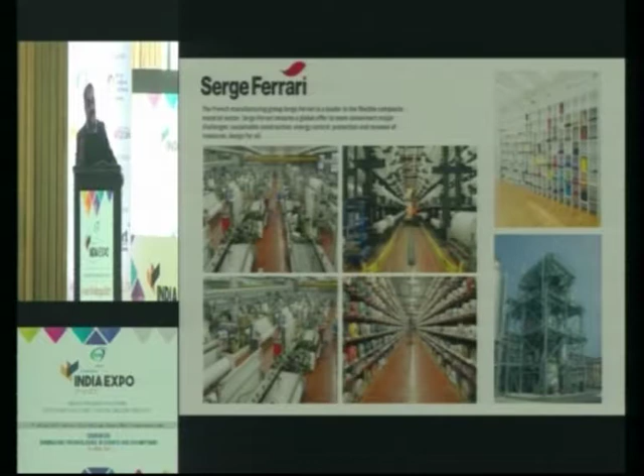My friend Mr. George has already covered the manufacturing process and the PVC, so I won't go deep into the manufacturing process, but I will highlight the technology Serge Ferrari is using today for the industry. We have a factory in La Tour-du-Pin, which is the Serge Ferrari factory and coating facility for Precontraint and for Batyline. Batyline is an extruded fabric coating.

We also have a factory in Switzerland where we manufacture our own yarn in Eglisau, and we have a recycling unit in Italy, in Ferrara. We have subsidiaries all over the world.

Now the applications: we are into multi-sector application of coated textiles. We are into textile facade, a permanent textile facade, and tensile architecture. We also manufacture fabric for furniture, indoor and outdoor, solar protection indoor and outdoor, modular structures and pagodas for the tent and event industry. We are also into printing fabric manufacturing.

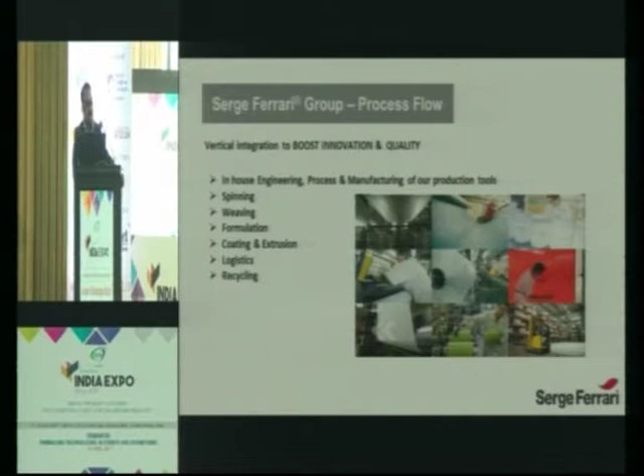About Ferrari, we have in-house engineering process and manufacturing of our production. We do manufacture yarns, spinning, weaving, formulation, coating and extrusion, logistics and recycling. It's a completely integrated company.

Now regarding the Ferrari technology: in 1974, when Serge Ferrari started this company, he innovated a technology called Precontraint technology. Precontraint is a French word, basically meaning pre-stress in English.

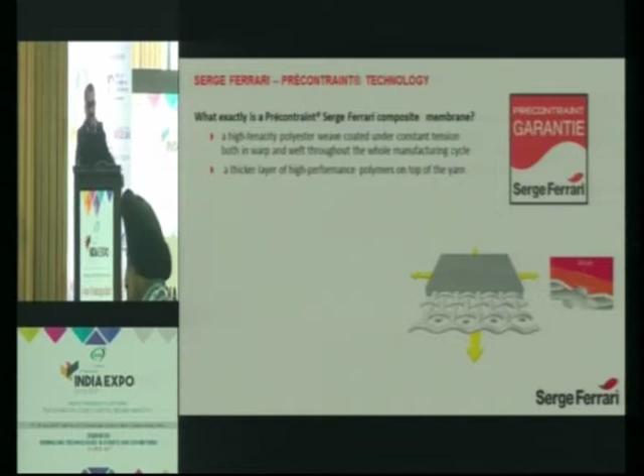During the coating process, the fabric is made of high tenacity polyester yarn. During the coating process, we stretch the yarn in both directions, warp and weft, with special application clips. The advantage is that the yarns will be flat and you will have better top coat thickness on the yarns.

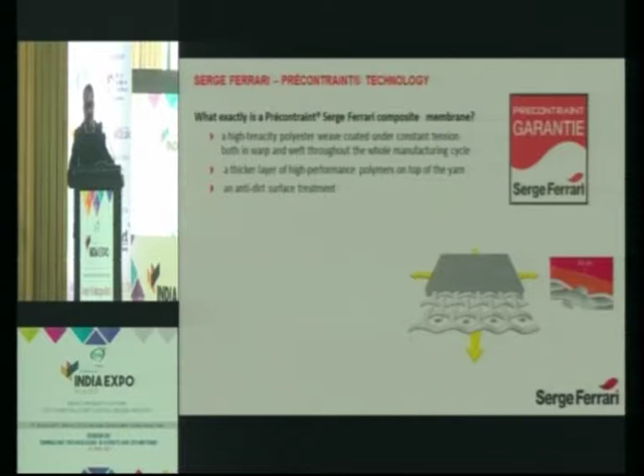The advantage is that the dimension stability of the fabric will be the same in both directions, giving better resistance to UV. You have more PVC, so the longevity of the fabric will be more, and the fabric will always be flat, which gives aesthetic value to your tent. There's easier fabrication with better welding and production homogeneity for safety.

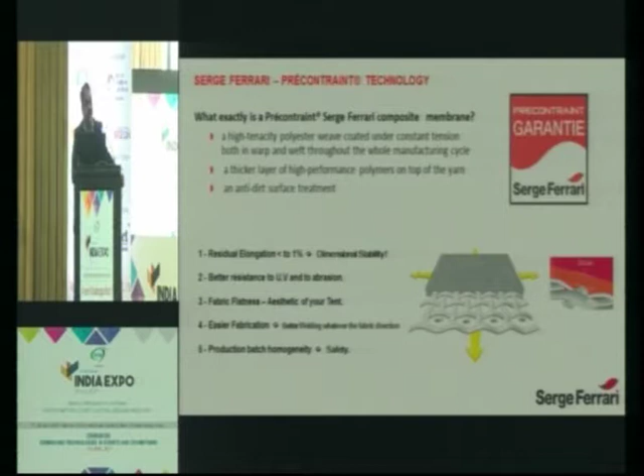Just to give you a small example: with Precontraint technology, the elongation is only about 0.4%, which is roughly 1.5 centimeters. Conventional coated fabrics may have elongation of 1.5%, depending on the fabric companies.

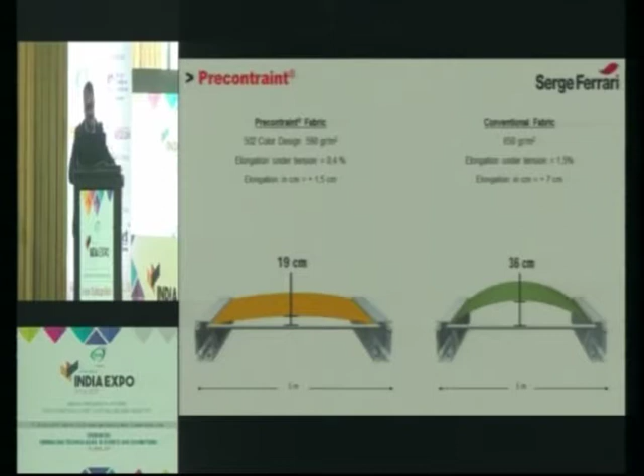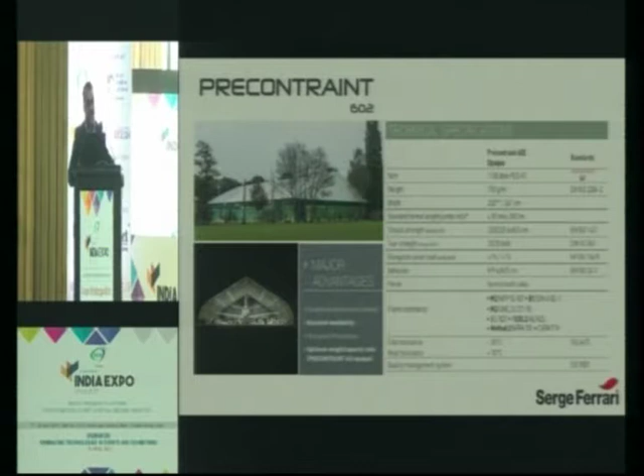We have a couple of ranges of fabric for the tent industry. We have two types: 750 gram and 830 gram. All the fabrics are flame retardant meeting all international standards. This one is 830 gram with PVDF top coating.

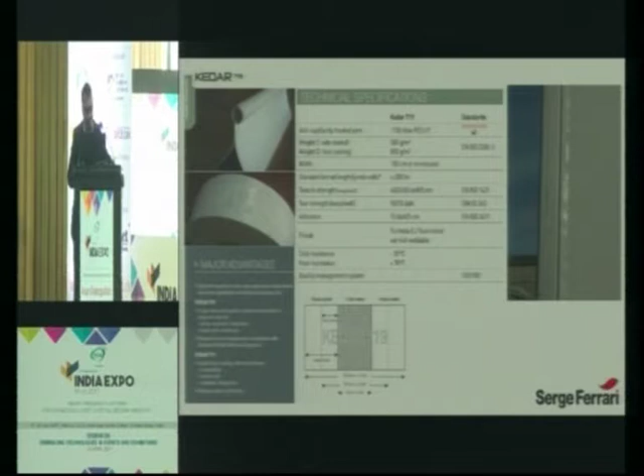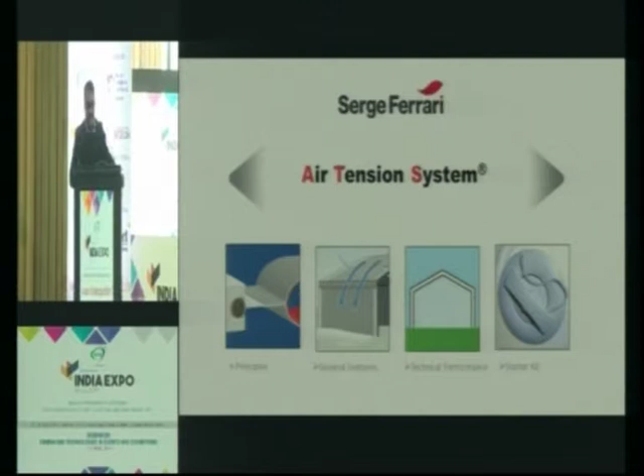Another product which Ferrari has introduced is the air tension system, ATS system. This is mainly used for tent structures. I would like to highlight the principles of the ATS system, general features, technical performance, and the kit Serge Ferrari provides for this application.

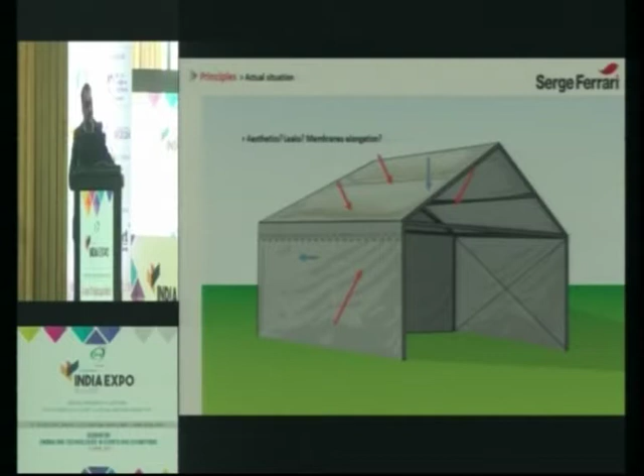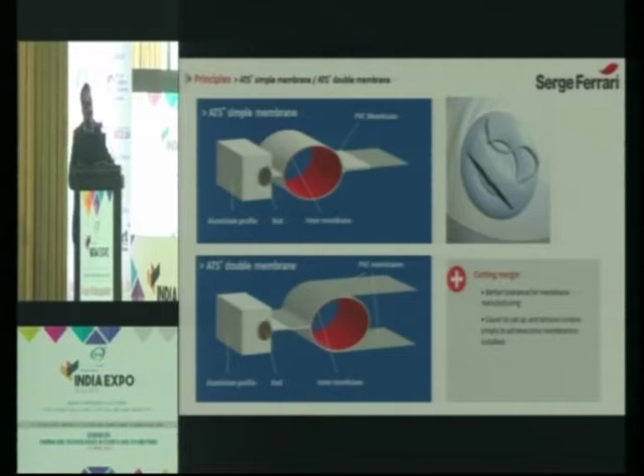Normally in membrane structures, because of the elongation, there is a possibility of water ponding as the fabric elongates. With the ATS system, we have developed a system with an inner membrane where you can inflate the air inside, which is welded to the fabric and to the Kedar system that goes into the aluminum profile. It offers better tolerance for membrane manufacturing, is easier to set up, and tension is simpler to achieve once the membrane is installed. It can be used for single membrane as well as double membrane.

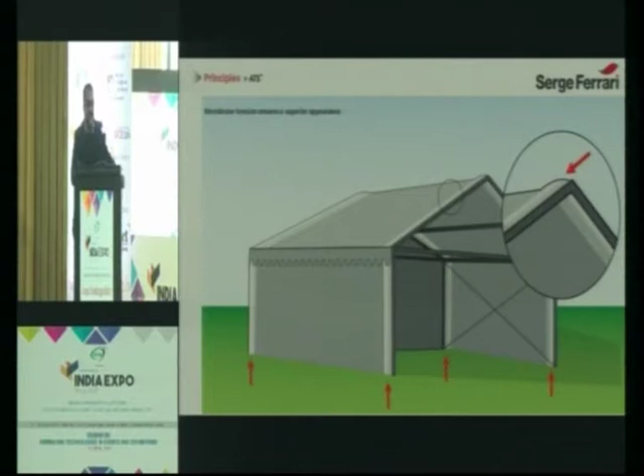You can see here the ATS system is on the edges of the complete tent structure, as highlighted. There you can see it is an inflated system.

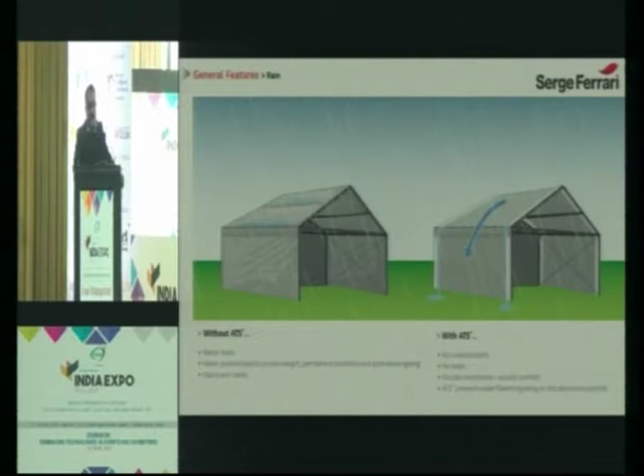The difference here is without ATS, there is a possibility of water leaks and water pockets, which leads to excess weight. With ATS, there are no water pockets. All the water goes down and there is no leak. Double membrane is also good for acoustic performance.

This is for rain, and it is also applicable for snow, with the same performance. And if you have high wind, it definitely doesn't flap. Flapping may lead to damage of the fabric.

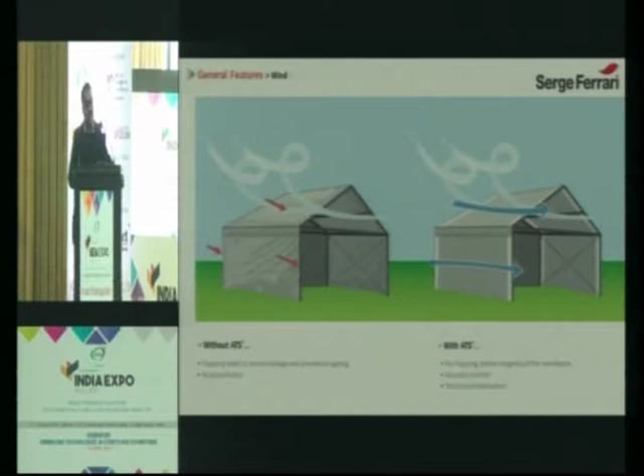For temperature control, with double membrane we can have better temperature control. We can reduce the energy needed for air conditioning or heating.

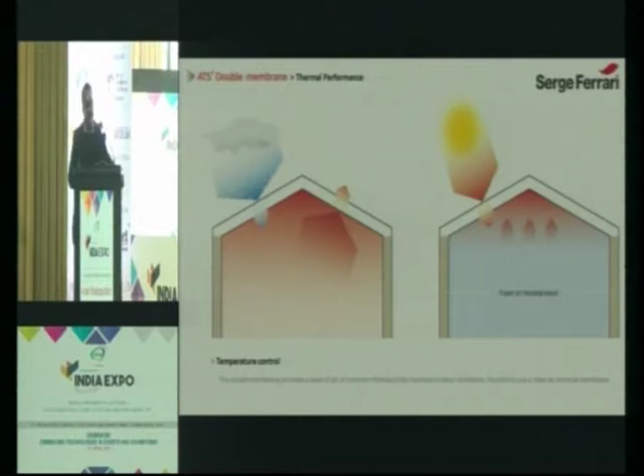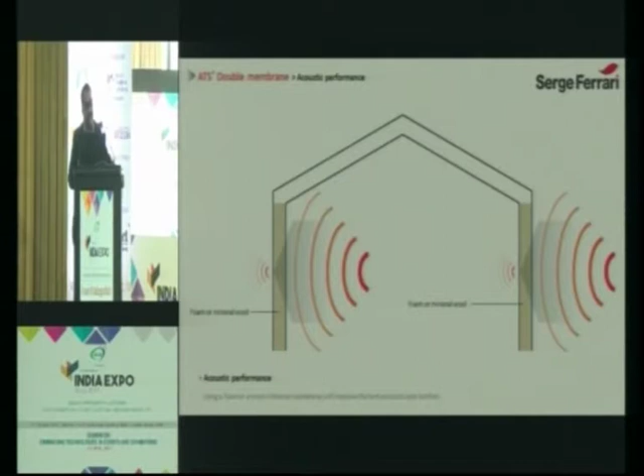Again for acoustic performance, the ATS double membrane is very effective if you want to have a show where you want to reduce reverberation of sound and achieve noise reduction. Double membrane is highly recommendable.

Again, anti-humidity condensation - if you use the double membrane, condensation is not there. So it's a condensation-proof application.

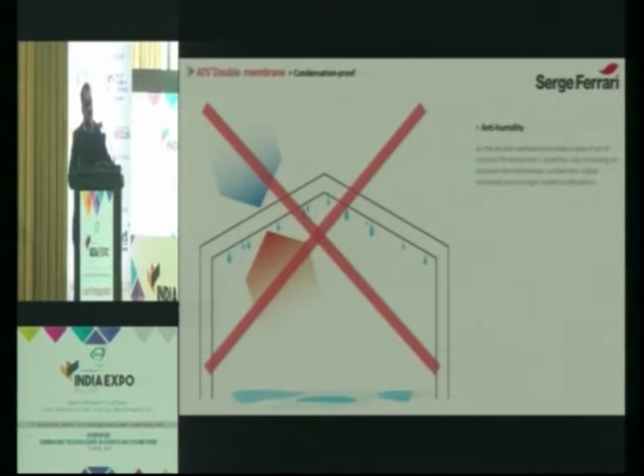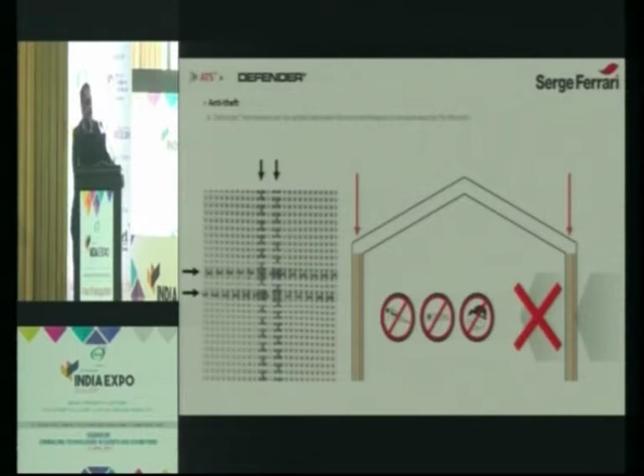Another product I would like to highlight is anti-theft. We have a defender membrane which can be added between the two membranes to ensure security for the tent. This membrane actually comes with stainless steel reinforcement with the fabric, so it is not possible to cut the fabric with a knife.

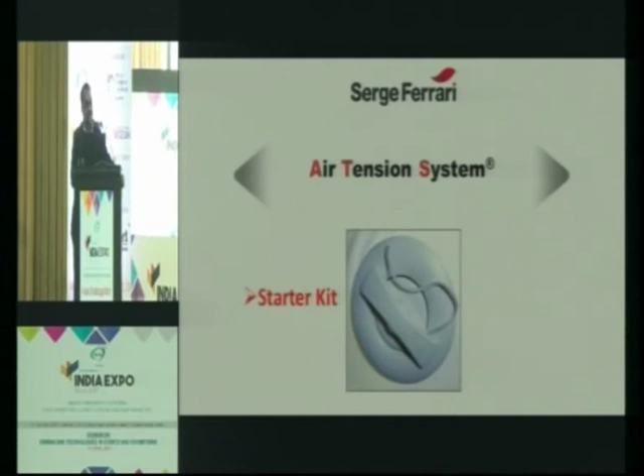This is a starter kit we have. We have the welding machine for the PVC plus compressor for the air. Then we have the clamp and the Ferrari valve to close the application. We have adapter, die, valve key, etc. This kit comes complete in one package, which is very easy to carry and very easy to use for the ATS system.

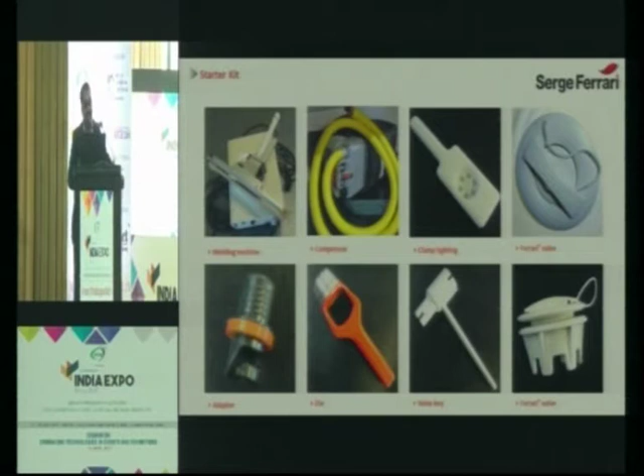This is just to show how it works, and we have it in 2 diameters, 150 and 100 diameter ATS system. So it's good for heat, sound, comfort and waterproofing, and much more with the ATS system, which we'll be launching very soon in this market.

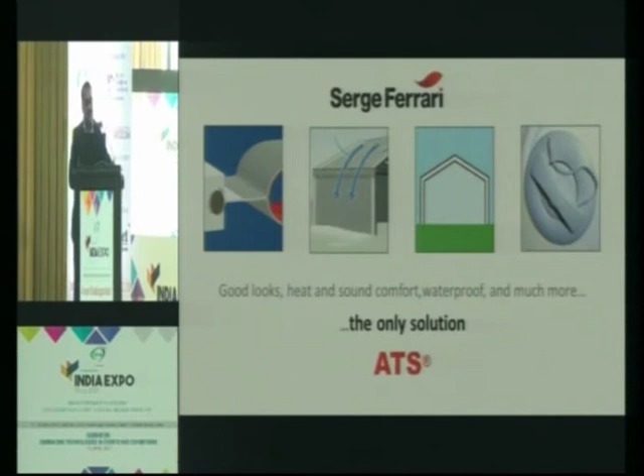And acoustics - Ferrari has a fabric for the inner layer for acoustic performance. It's called Batyline AW. With a 100mm air gap between the two fabrics, the reverberation of sound can be reduced from 4 seconds to 1.2 seconds depending on the area and structure. The NRC value is 0.65.